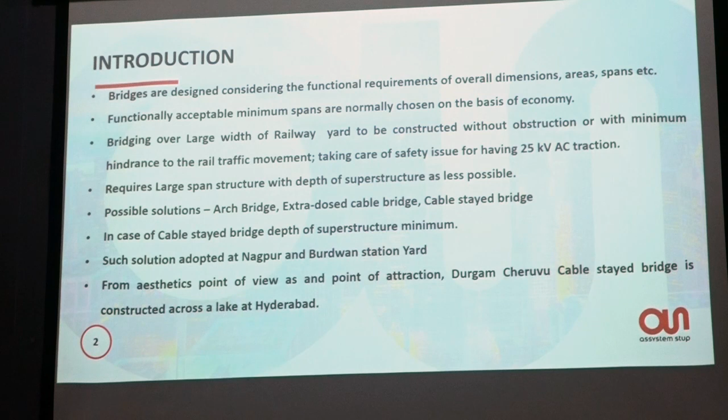The two projects I did were the same, crossing over the railways. The road has to cross the railway line, and the demand from railway was that there should not be any pier in the railway boundary. So the long span bridge was the first solution that came across for my work.

Then the second challenge was constructing this bridge. Any bridge, the design is one part, the construction is another, and the bridge design as well as construction both go hand in hand. So I am talking more about the construction engineering today rather than the design work.

For long span, the possible solutions could be the arch bridge, extra-dosed bridge, or cable stayed bridge. But being a cable stayed bridge very small in its depth, so it was chosen. And these solutions were adopted in two locations: one is at Nagpur and one is at Burdwan, West Bengal.

The third one I will talk today is basically an architectural driven project, that is the Durgam Cheruvu project. Aesthetic was given more importance and that bridge was done, so that was a new experience for me. Generally the bridge designers don't come across the architects, so that third bridge will be interesting for everybody.

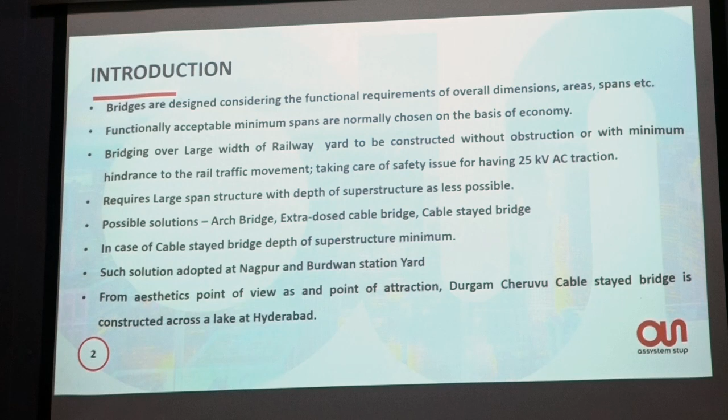So today's presentation will be on these three bridges: one is cable stayed bridge at Nagpur, then the second is cable stayed bridge at Burdwan, West Bengal, and the third is Durgam Cheruvu bridge, Hyderabad.

So for Nagpur, the total span length was 200 meters, and the pylon was placed at this center, not exactly at the center. So the two spans on the right and left were not exactly balanced. One was 88 meters, another was 112 meters. It was a 6-lane bridge, so two separate 3-lane carriageways were there.

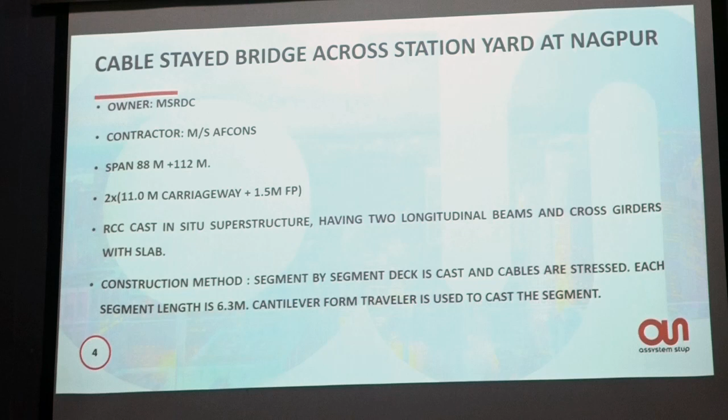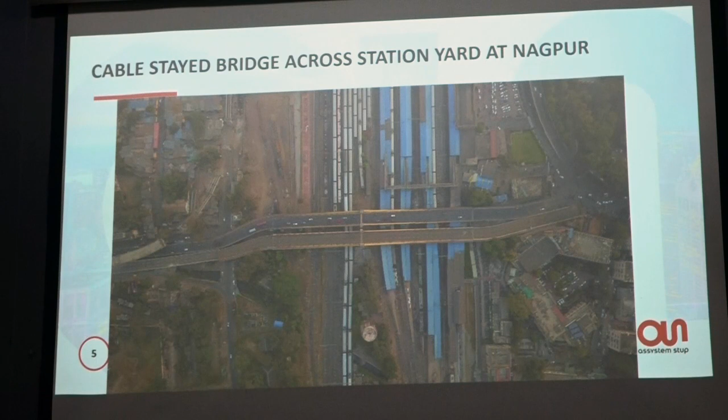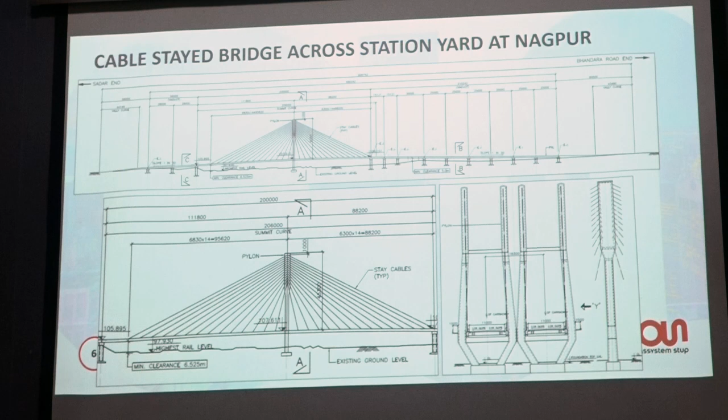The deck is just 1.2 meter depth, so the minimum depth was whatever required clearance was achieved, and the junction was also satisfied with that distance.

With 1.2 meter depth, the overall construction depth was managed. But the side beams were extended later because during construction there was some difficulty. The original scheme was something different, and because of some constraint the scheme was changed, and the depth of the beams was increased above the deck also. So this is something like a semi-through kind of bridge.

The cables are placed on the side two beams. There are two beams running along the bridge lines, 12.3 meter apart, and the carriageway is 11 meter accommodated in between. On both the bridge pylons, there is a footpath of 1.5 meter on the outside of one beam.

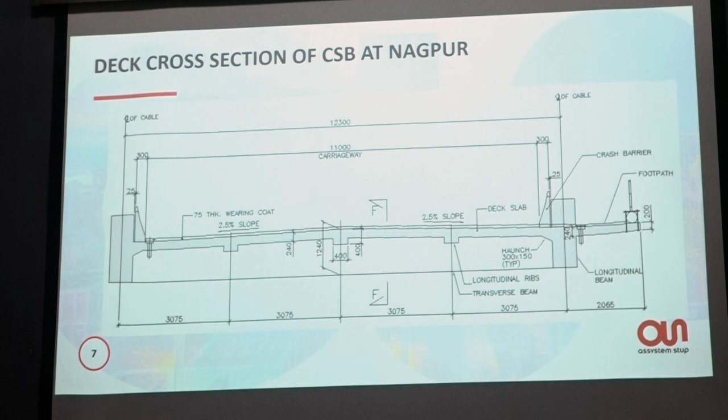Probably the railway yard was extended, then some spans were added, and the bridge was very old, so it was required to be demolished and a new bridge constructed. Vertical clearance was also increased as per the latest SOD, so the new bridge is higher than the older bridge. The span was chosen as the railway asked to clear the railway boundary.

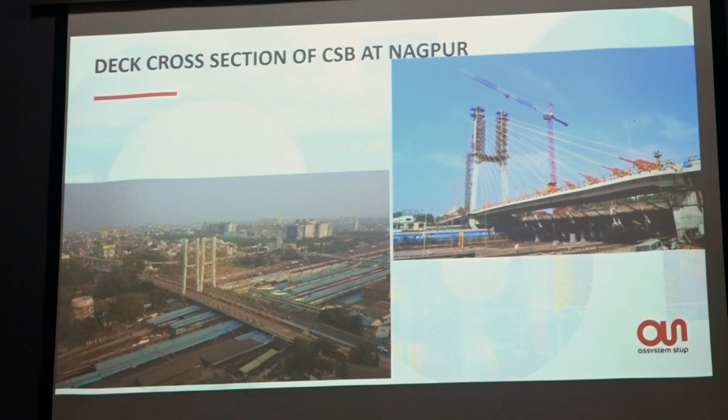The left bottom view shows both bridges after completion. We can imagine the difficulty in construction, because the situation was with the busy railway line at Nagpur, and train frequency is very high there. Also it is a Rajdhani route, so it cannot be closed, and the construction was very difficult.

Now of course the construction cannot be done in a conventional way, where conventionally we erect the staging, cast the deck, and remove the staging after required strength. So that was not possible here.

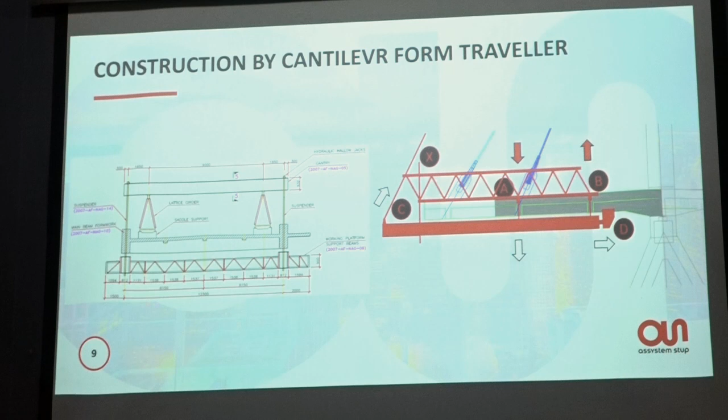So the further construction was segment by segment. Each segment was about 6.3 meter length, and then the permanent cable was stretched. So the deck becomes self-supported, not fully cantilever, and the load moves further for taking further concrete.

Now in this method, or by any way we construct a bridge, we have to always keep our goal that whatever clearance is required, we have to satisfy. Whatever geometry of the bridge is required or desired, as per the vertical curve or whatever form, that has to be achieved at the end of its construction.

So the first diagram shows the deflection diagram, which is the deflection due to dead load, whatever permanent loads are there. Now I have to construct a bridge with the reverse of that diagram. Then only the final geometry will come to the original desired one. So that is called a camber diagram.

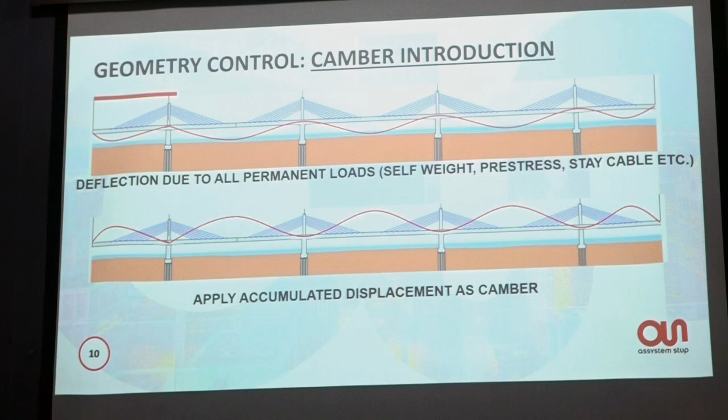Now camber, in case of conventional staging, is easier. We can do it in one stage - whatever the camber diagram is, we can erect the shuttering in the form of camber, lay the concrete, and after removal of staging, it will come to the desired shape. But in segmental construction, that is slightly tricky.

In segmental construction, the deflections go on accumulating. Suppose, for schematic illustration, there are 3 segments: S1, S2, S3. Now S1 is erected, then it will deflect because of its self-weight. After erecting S2, S2 will also deflect, and it will deflect S1 also. So forth and so on.

So the reverse of whatever accumulated deflection curve there is, we can reverse as a camber curve. But here the concrete strength of S1 will be different when S3 is cast, and when S2 is cast it is also different. So we have to account for that, and that is slightly tricky.

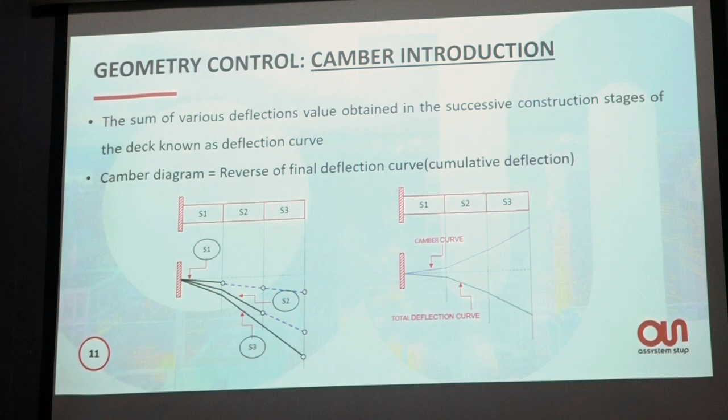Nowadays software is available where we can model such non-linearity. The overall behavior is non-linear. To capture this camber diagram, we have to model the concrete strength curve very precisely, and the activity, because generally we plan something and at site it goes something else. So we have to accommodate that in the design.

So the factors affecting the overall construction are the concrete strength at various times. Generally we designate concrete strength at the 28th day, but here it is equally important to consider concrete strength at different ages, because the age of each segment is different at a given point of time. Then the second factor affecting the overall camber or deflections is ambient temperature.

If we have a pure cantilever and measure its survey in the morning, the levels will be different than if we measure it in the afternoon. Similarly, the pylons are very tall, and there is an effect of sun path, because these pylons were facing exactly east-west. So in the morning the pylon was deflecting on one side, and in the evening it was deflecting on the other side.

So that also has an effect. Then the assessment of construction load is very much affecting the design. Whatever weight of the gantry was initially calculated versus what was actually built, there was quite a difference, and then we reiterated all the calculations once again and found we were close by. So that assessment of actual dead load and the construction equipment the contractor has planned has to be considered in the calculation of the camber diagram.

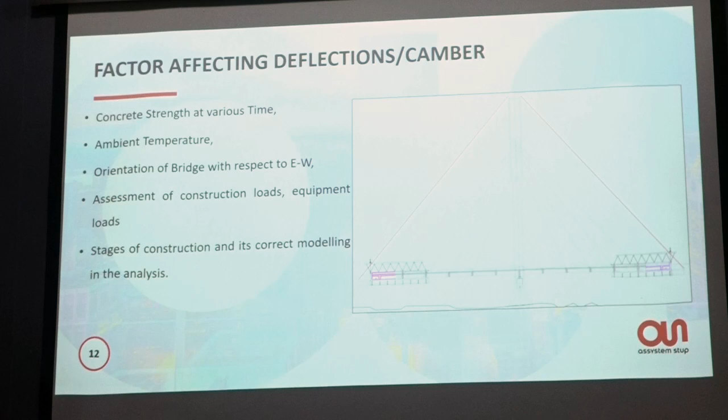Nowadays the CEB-FIP model is a popular one to assess and analyze concrete strength at different times. So CEB-FIP Model 1990 was used. In that model, the concrete strength at any time can be considered with the expression mentioned here. Also, it calculates the effect of creep and shrinkage.

The concrete deflects because of sustained load, that is called creep. Also it exhibits shrinkage - shrinkage in the initial period is high, and capturing that in the assessment of deflection is very important, and that is available in any modern software, and such modeling was done.

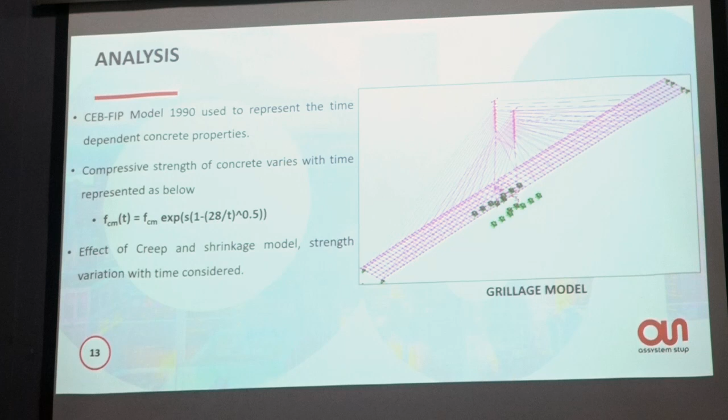Modeling was done initially with finite element method and shell elements, but it was taking too long to analyze. Then we shifted to a grillage model, and we found the results were close to what we modeled, so we continued with the grillage model, which was faster for taking trials, because anything we do is not at one go. We plan something and at site it happens something else, so we have to reiterate the whole process and do corrections for the next cycle. The grillage model was more effective, so the grillage has been considered.

Now the deck and tower monitoring is very much important during construction. Initially we plan something, and as per that planning, from the designer's perspective, we give some output with the assumption of loads and whatever concrete data is there. We generally give the deflections of beam at various locations at various activities. Similarly, deflections or the values for the pylon deflections are also given.

Then those are monitored at site, and the correlation between the analysis and actual at site is done. So it is a bidirectional process - the designer gives some output, then it is cross verified at site. If there is a difference, we have to cross verify whether the assumptions are going wrong, or any correction is required in the analysis, or any factors which are not really captured. So we have to see.

In the initial period, we were not considering the temperature, and that has a great impact. So that was a takeaway in this analysis overall model. There were certain more also, like whatever time cycle we were considering and whatever time cycle actually was happening - that was also different. So then we corrected everything, and we came to a close result after say the third or fourth segment, and we found that it was okay till the end of construction. So the first 3-4 segment construction was slightly difficult.

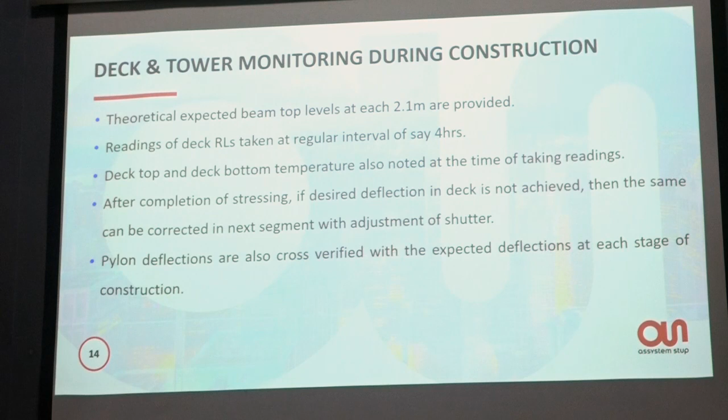Now coming to the second bridge, that is ROB at Bardhaman. It is in West Bengal. That is also a similar situation like Nagpur - it has also, I mean, a very busy yard and busy station. Bardhaman is a famous station, I think it is on the Delhi-Kolkata line of railway. There the total length of bridge was 188 meters - in Nagpur it was 200, here it is 188 meters. But here the unbalancing was more.

I mean, the pylon location was chosen outside the railway boundary. So from execution point of view, that was a very good decision - that construction of the pylon away from the railway line is always desirable, and that was done. So the span on the main railway yard or railway station side was 124 meters, and on the back side it was just 64 meters only. It was a 4-lane ROB, so there are 2 carriageways of 7.5 meters, then there were footpaths as a mandatory requirement.

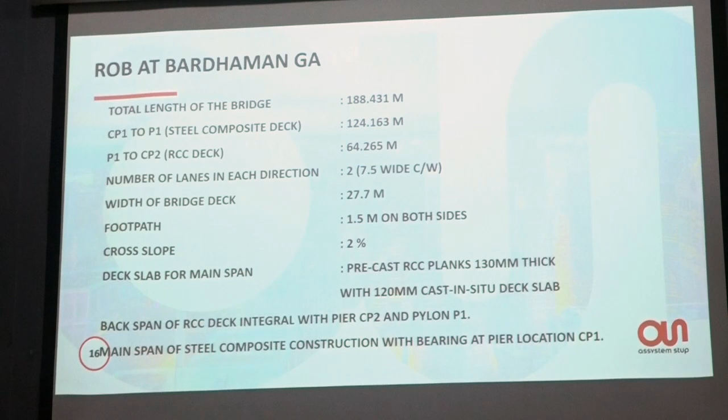So the general alignment drawing looks like this. The backside span is very short, almost half the length of the main span, and the tower height here also was almost 51 meters. As we see, the front span is bigger, back span is shorter. We have to balance the weight at the pylon, otherwise there will be a continuous unbalanced movement.

So the section of the front span was steel girder - lighter steel hollow girders with minimum thickness of deck slab. Whereas on the back side, we have to generate the dead load, so solid RCC beams were there, and the deck slab was also made thicker to balance the overall weight.

The back side and the pylon were made integral - so the pylon below the deck and the back span is integral and in concrete. So this much area is integral. Above this, the pylon is in steel - steel segments were done.

So by the time the foundation and this backspan was done, all the girders as well as the pylon fabrication was ready. So erection of this pylon as well as erection of the front span was much faster as compared to our earlier case of Nagpur, which was totally in concrete.

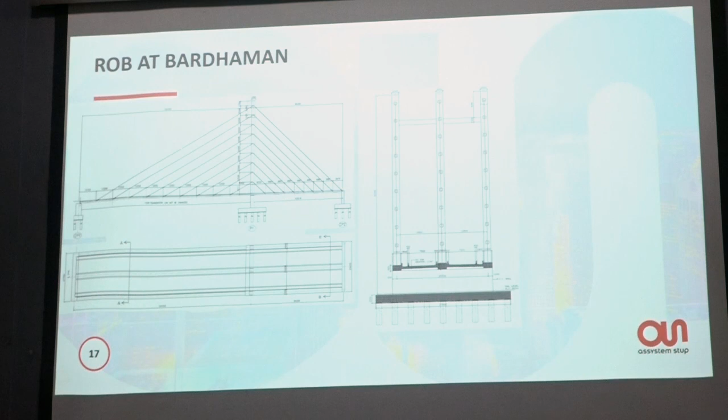Now the construction sequence was typically planned like this: the backspan was constructed first - the two piers and the backspan integral were constructed. Then the three steel pylons were erected using gantries and tower cranes. Then erection of the first panel was done, again with cranes, and those were fixed. After that, the steel members of each segment were erected using the specially designed deck erection crane. I will show in the next slide.

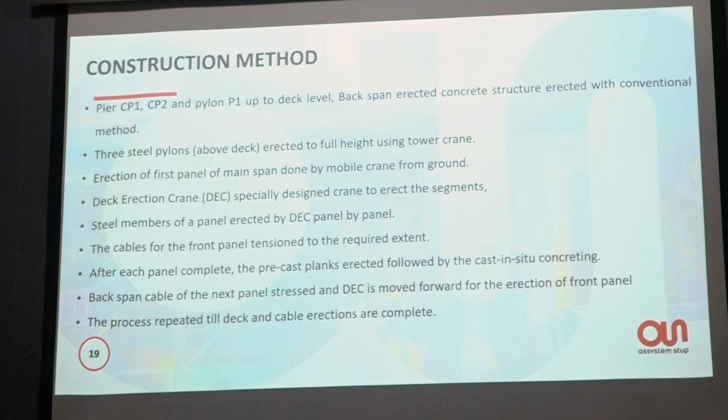The material for the next segments was fed from the back side, so there was no disturbance for the railway below. All materials for construction of the deck were fed from the back side. A crane standing on the first front panel supports these segments, holding each one until it is connected to the already constructed deck.

Then the permanent cables are stressed, and the deck slab was constructed with precast panels. Precast panels were placed, and the remaining small portion was done with in-situ concreting. This construction method was much faster and more precise compared to the earlier case.

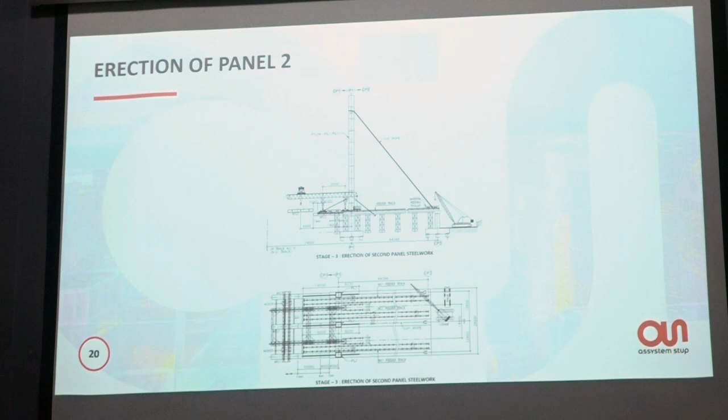The same sequence was followed till the end of construction. This was the earlier slide showing the second panel erection, and now this is the erection of the last panel, the 10th panel. The crane is moving to take up erection of the 10th and final panel.

The back staging was kept as it is till the end of construction, because it was required from the design point of view, as all cables were erected on the back side also, stage by stage. Otherwise there would have been a huge unbalanced bending moment on the pylon.

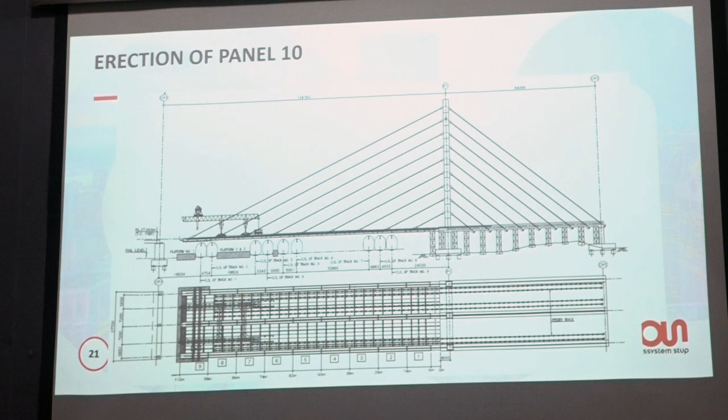Whereas in Nagpur it was almost 220 tons for erecting a 6 meter segment, here the segment length was longer, at 12 meters, because generally steel plates are available in lengths of 12 meters. So each segment on the Bardhaman bridge was 12 meters in length on the front side.

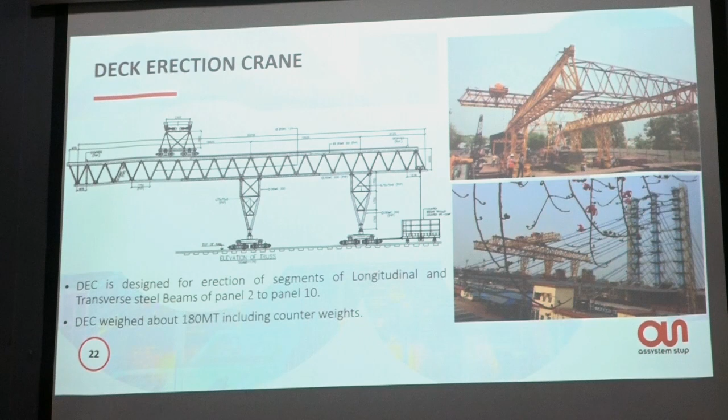The geometry control methodology was similar to what we did in Nagpur, but here the difference is that the panels were prefabricated steel prefabrication. The holding bolt positions were already fixed in the already constructed deck, so there was hardly any chance to adjust the deck during construction.

In Nagpur we used to adjust the deck by adjusting shutter levels, but this adjustment was not possible here. The only adjustment possible was through pre-camber in the steel girder. That was exercised, and if there was any difference after erection, it was adjusted through cable forces only. So these were the two adjustments possible.

The geometry control methodology is similar. After each activity, survey readings were monitored and compared with the theoretical values expected in the design. In the case of steel girders, the precision in erection, the E value, and expected deflections were more precise compared to the concrete case. So geometry control for the Bardhaman bridge was also much easier.

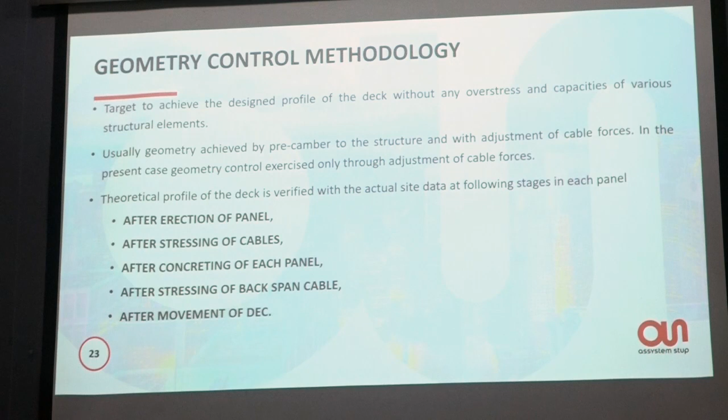After completion of the bridge, there were three girders. The uniqueness of this bridge is that there were three pylons and three longitudinal girders because of depth restriction. We achieved geometry accuracy of plus minus 60 mm, and after the wearing coat that was also covered. This accuracy was achieved with a panel length of 12 meters; had it been a smaller panel length, we probably could have achieved even more precision.

After looking at the construction of both bridges, I think the Bardhaman bridge was planned after the Nagpur pylon was constructed. They then decided to shift the pylon outside the railway boundary for safety reasons and changed the deck from concrete to structural steel. This decision came from the authority itself, and construction was so fast that before completion of the second bridge in Nagpur, the Bardhaman bridge was completed. Though started much later, it was completed much faster, and that's why it is now popular in railways.

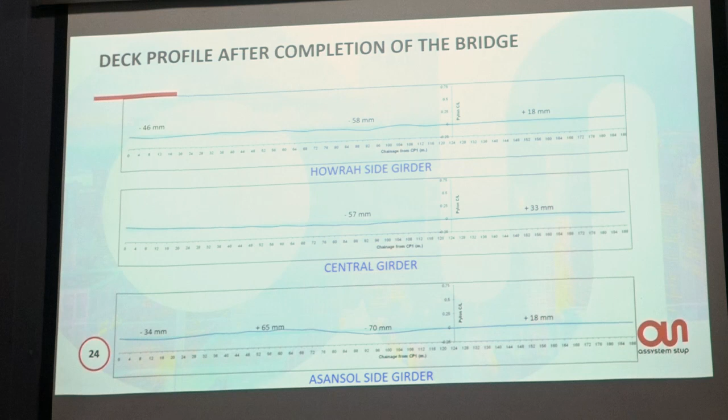Now in Mumbai suburbs, some more bridges are planned like this to bridge between the east and west sides of the railway line. So some more such bridges will come up in Mumbai now. That is the popular solution in railways now for crossing the railway line.

Now coming to the third bridge which I am going to talk about. This is at Hyderabad. It again has a 234 meter central span, and there are side spans which are smaller.

Ideally for a 234 meter span, we would have gone for at least 120 to 125 meter side span. But because of the geometric constraint and the land problem, the spans were restricted to 90 meter, 96 meter.

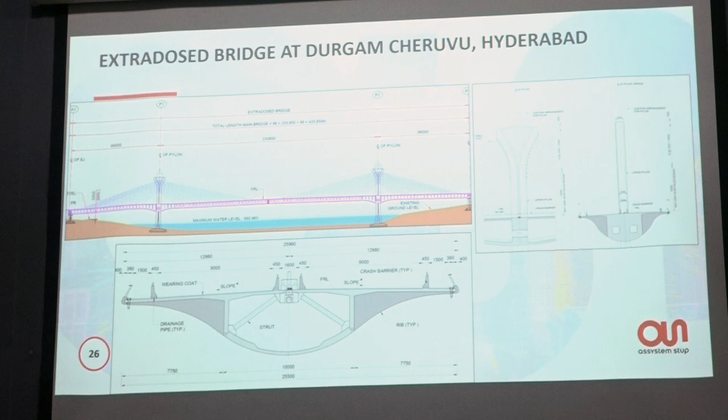I'll show the next photograph so that it will be easy to appreciate. The overall design of the bridge is mainly an aesthetic driven project. Initially only the 234 meter span was fixed, so we proposed some conventional option of a cable stayed bridge.

With rectangular sections of steel, which was easy after Bardhaman, so a similar solution was proposed with the 234 meter span also. It was a cable stayed bridge, but then the authority said they were going to develop the lake for a public place.

From that perspective they demanded that it should be an aesthetically pleasing structure. So the architect came in. That was our first experience in an infrastructure project with architectural input, which was very difficult at the initial time, but later on we collaborated together and came up with a good solution.

So the dimensioning or the basic shapes were given by architects, then all the detailing was done by the architect. The right side shows the 3D animated view, which was imagined by the architects initially, and the left is the almost completed bridge.

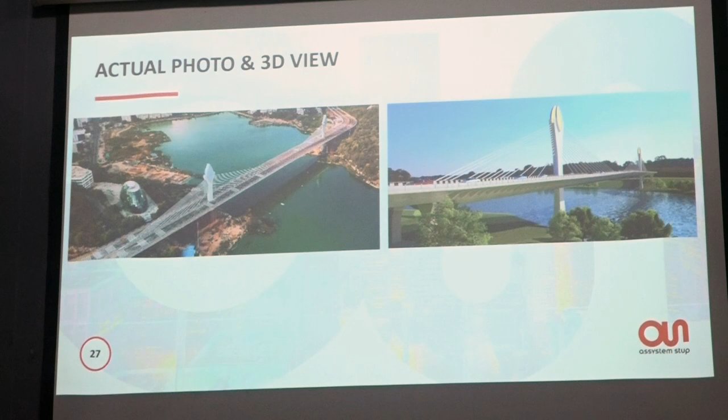Which are very much close by, and nowadays it is popular in Hyderabad to visit this place, and it has become a popular place.

Again, here the construction is of course segmental. The backspans were constructed using conventional staging. All the girders, all the segments are precast segments. On the back side, they were erected on the conventional staging, whereas on the front, inside the lake, it is not allowed to erect any.

That was not even possible, erecting that much long staging. So it is done with stage by stage construction.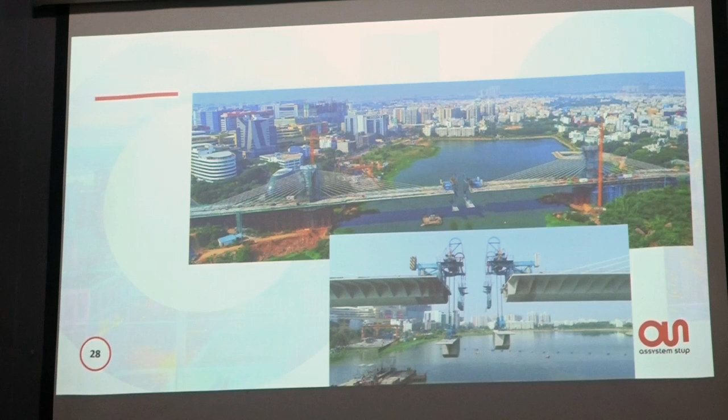The bottom view shows the closer picture of segment erection in place. Again, the analysis is done in a similar way, stage by stage analysis was done, then the same was given on the drawing, and the expected levels were given, and then it was cross verified at each stage. Here the advantage was the deck is very stiff.

This is called an extradosed bridge, which has got a very deep beam and stiff deck. It is not much sensitive to deflection, so the geometry control itself was not much of an issue, but it has a disadvantage also. Once the deck is stiff, the adjustment, if anything goes wrong, is also a difficult one.

So whatever deflection curve was required, that was required to be built into the segment construction itself, and that geometry precision was done in the casting yard itself. The segments were cast to the required shape and then erected. Then some minor adjustments were done at site using shim plates or some kind of thing.

So this was the backside span, which was erected first on staging. Now it is ready for taking the next segment. Now the segments are erected one by one. So in between, the stage is like that.

The segments were erected one by one, and cables were stressed. Then the erection gantries are moved forward, and the next segment is held, and then pre-stressed. There were internal pre-stress as well as external pre-stress.

Looking at all these three bridges - the first bridge was very early in my career, I had just 4.5 years of experience then. Of course there were experts who were guiding me all the way. So the first Santra Market Bridge turned my vision, because earlier it was just putting some numbers and getting results and putting them in the drawing.

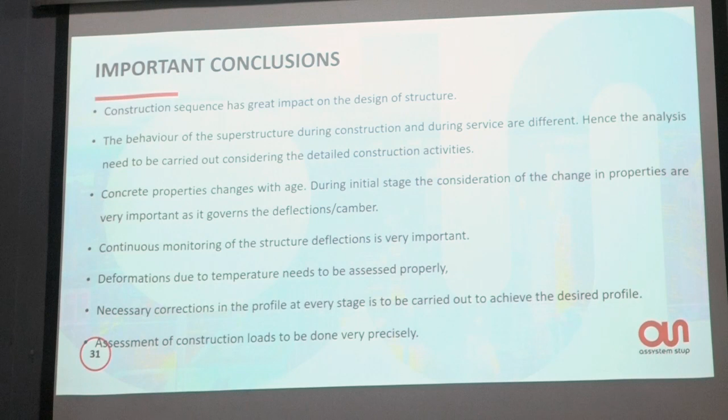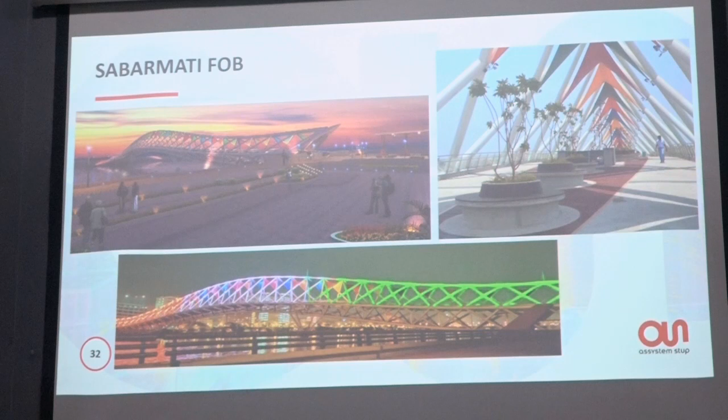After successful completion of the Hyderabad Bridge, the structural and architectural teams further collaborated for this nice bridge—the left shows the animated view, and the right shows the bottom and side views. This is the Sabarmati foot-over bridge at Ahmedabad, which is almost completed and will be inaugurated very soon. This is again a collaboration of structural and architectural people in infrastructure, which is very rare. It's aesthetic driven, but structurally we also optimized it, and the bridge is now ready for the public, coming very soon.

There are two further bridges located in Pune that we are working on. This is the Deccan Bridge for Pune Metro—Sarla Madam is present, we are working on Pune Metro—and it is designed based on Mawla's Pagdi; the cross-section view looks like Mawla's Pagdi. That was the architectural theme for the structure.

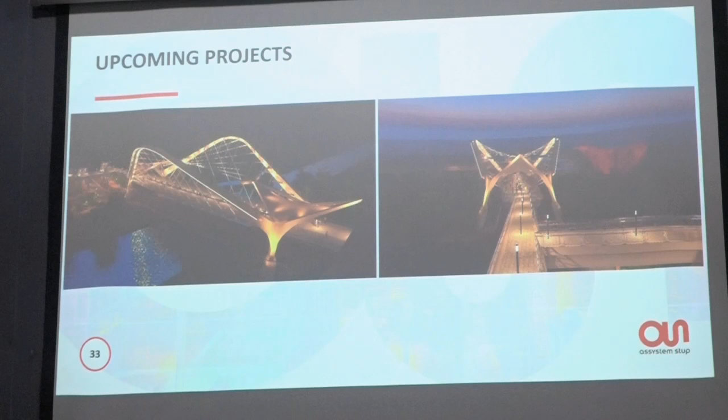Talking about the structure itself would be another lecture taking more than an hour, because the erection of these arches, their behavior, the tensile elements used, and the optimization—all these activities were done with great effort. I hope this will be realized soon. Let's see, because this bridge has not yet started.

The third bridge is again an architecture-driven project, also in Pune city, near Sambhaji Garden for Pune Metro, connecting to the station. This is also a foot-over bridge, with the architectural theme driven from the shape of a Tanpura. It is coming near the Bal Gandharva auditorium. So Tanpura is the theme for this, and it is under construction—the pylon construction has started, the foundation is complete, and the pylon is almost completed up to deck level. So this bridge will also come.

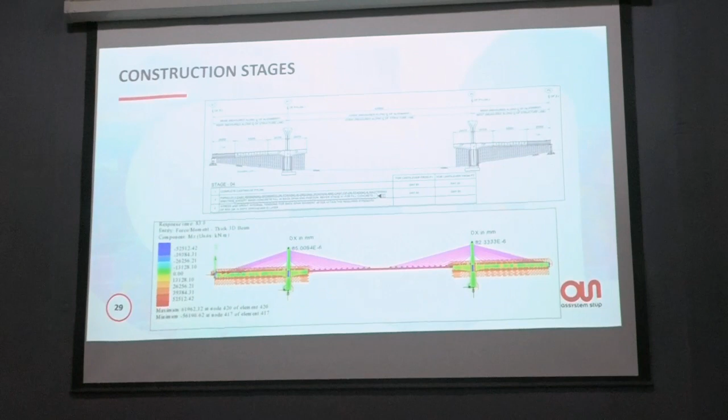Regarding the spring elements shown in the third bridge—the staging is resting not exactly on hard strata. I won't say loose strata, but not exactly on rock. So the deformation of staging has to be considered, otherwise the pre-camber could not be done properly. The spring values were taken from plate load tests, which were done randomly at various locations, and then those spring values were decided.

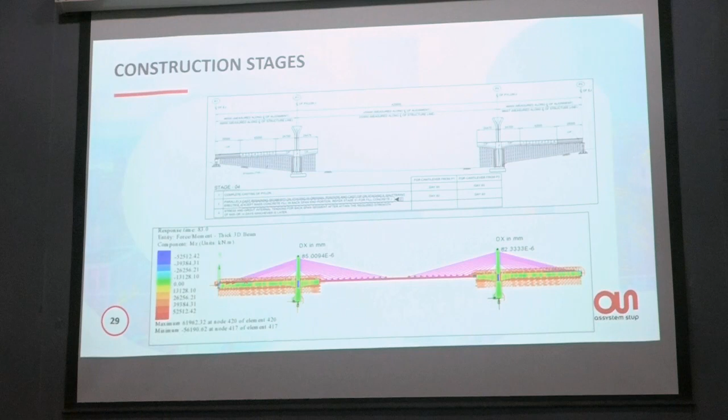Regarding the accuracy achieved with previously defined camber values during construction, the total span is 234 meters, so roughly 120 meters from either side is a cantilever.

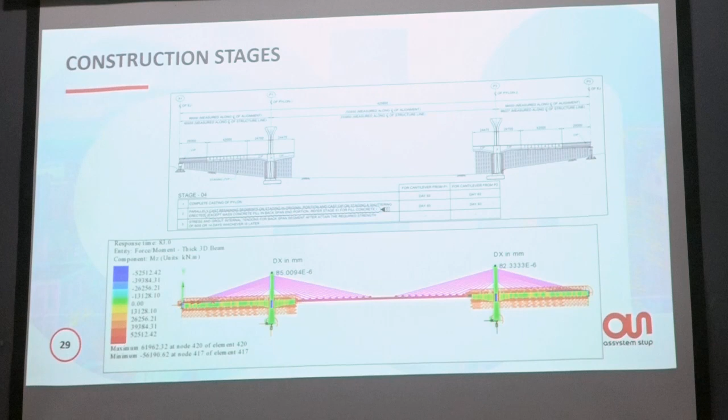The final three segments were required to do the shimming. There was a difference of about 55 to 60 mm between the two cantilevers, which were originally planned to be constructed symmetrically. In reality, that didn't happen because the right side pylon was not accessible initially, then some land issue was there, which was withheld. So the right side pylon was constructed later, and that deck was erected late. We decided to stop construction on the left side, but there was pressure because some progress had to be seen at site, so the left deck was constructed.

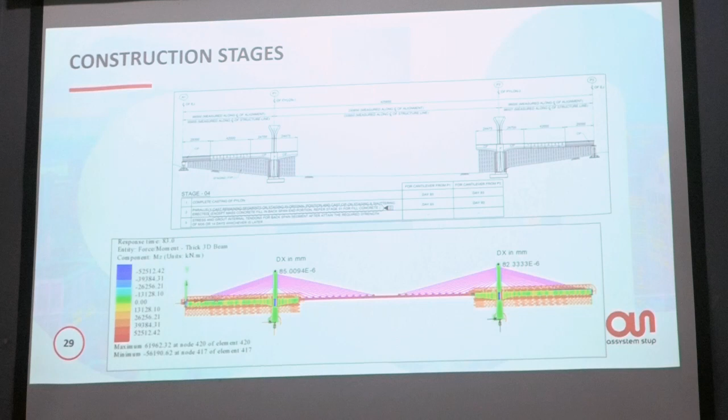But after all, there was still a 60 mm difference between the two sides of the cantilever in the 120 meter span. They were adjusted in three segments on either side, so total 6 segments were done with correction at site using shimming plate and epoxy grouting, etc. And that was achieved.

Good evening sir. The first Nagpur bridge that you were talking about - in other bridges you have used precast members, but in that bridge it was cast in situ. That was the first experience. After learning from that project, we changed from cast in situ to steel. The third one is architecturally driven, so steel was preferable from a designer's point of view, but not from an architectural point of view.

The third one using precast is always a faster construction, the construction pace is faster - that was the thing that I was worrying about. Why so much hassle taking the concrete strength? The original tender was bid on that basis, so certainly we cannot change from concrete to steel. It is a costlier material. But at the end we found that had it been converted to steel, the life of everybody would be easier. Some things are not in control of the designer only, and that has cost implications also.

I would like to know more about the CEB FIP model 1990. Does it only measure the compressive strength part? No, it gives the overall behavior of concrete - creep, shrinkage, as well as strength, and strength directly affects the E value, elasticity. So all three parameters are considered in that. Is it freely available? Yes, in software now, Midas, Lusas - those software have it inbuilt, that is available.

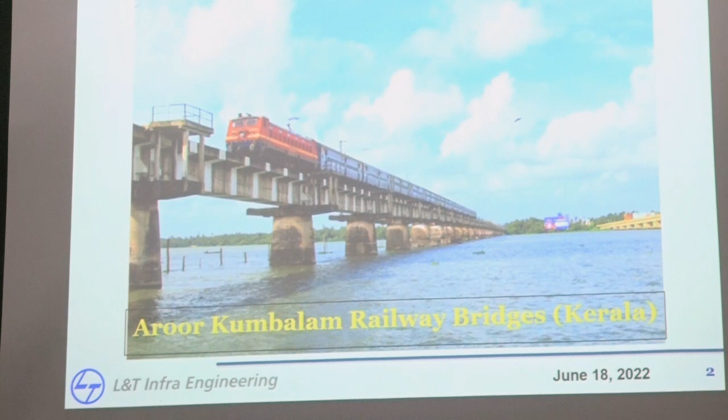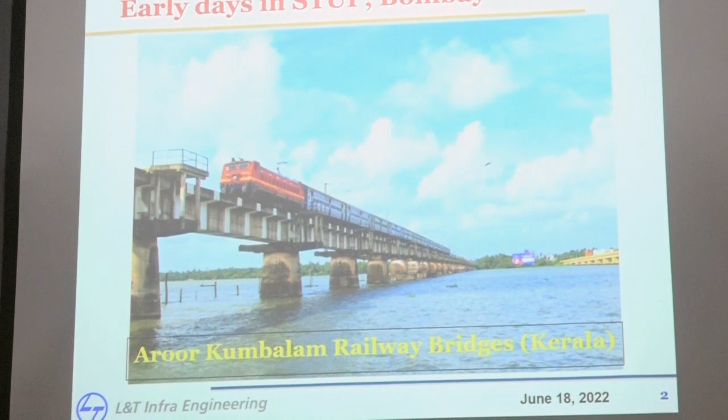The first project, I was all of 24 when I got to do this job, my first job after coming back from the US, finishing my masters. The project was the only example of a segmental bridge in railway. Railways don't like segmental bridges, they like their monolithic structures. Metros also run rail, but when I say railways, I mean Indian Railways. They hate segmental bridges, and this was the first and only example of it.

You should know the background behind why it became a reality. You should blame it on the first recipient of this award, Mr. E. Sridharan. He happened to be the General Manager in Southern Railway when this project was conceptualized, and he is not averse to doing interesting and new things. He introduced many new things, new contractors, new construction techniques, very boldly. So this was an example where he said, okay, let's try out the segmental bridge.

But what was most shocking was that STUP Consultants decided to try me out designing the work. What did I know about prestressed concrete? Nearly zero, other than passing the course. What did I know about segmental bridges? I hadn't seen one in my life. What did I know about prestressing? Nothing. Launching? Nothing. So it was a big learning exercise for me.

But that's where the caliber of your organization comes in - Yogesh will vouch for it. We've all gone through the same companies, STUP Consultants, and they had a great bunch of seniors. I had past recipients of this recognition, also my mentors, my guides, my bosses - Sri Joglekar, Mr. N. Raghavan. They were all my mentors in STUP in those days, and I was a green 24-year-old engineer doing this design.

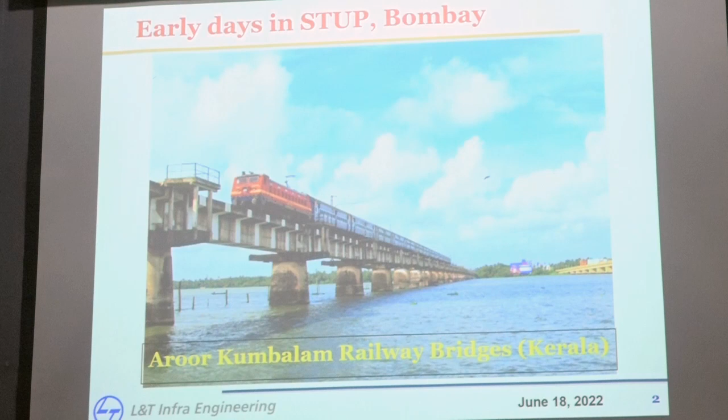I'm not saying it's a great bridge, but for me it's a lifetime of memory in which I got to work on this segmental bridge, and I didn't know what a segmental bridge was. The only thing I did was, at the end of the design, I said I will not support this project unless you allow me to go and visit the site and see it during construction.

This I want to encourage each one of you when you take up your profession. The moment you finish, if you become a designer, you will be office bound, and I find most people like office bound jobs - they don't like site work. It's a rough, difficult place, no malls, no theatres, in the midst of nowhere, especially no infrastructure - that's why we are going there to build one.

So that's why I insisted, because I find that every visit to the site is a great learning experience. From now onwards, I would encourage all of you who go to these construction sites or see construction activities around you, to look at it from an engineer's perspective rather than a layman or tourist perspective. It may be a beautiful structure, but there are a lot more heartaches in the realization of that.

So, as I said, this was a modest span, what we call 100 feet in railway parlance, built across the backwaters of Kerala. What you can see is actually the launching girder of that day. Please remember this is a launching girder of the 80s, very poorly mechanized, or virtually no mechanization.

It is rolling on the back on the erected span, and the front is moved, as you can see, by a barge. The barge supports the front end and is guided forward. It runs, and then you see a lot of these cross trusses. Nowadays you will find a more sophisticated arrangement, as you have seen in Durgam Cheruvu, where they showed wire, suspenders, mechanical lifting - these were all chain pulley blocks, you had no great mechanism. So you can understand that construction engineering, construction activity, and design are continuously changing.

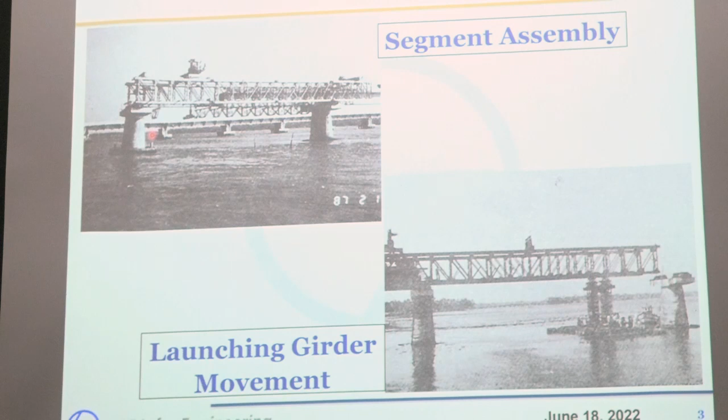When we did this design, we did not have a computer. There was no personal computer. In 1986, we bought the first personal computer, spending 1 lakh rupees on that, and it took 6 months of management notes to justify the cost-benefit analysis. You won't believe it, it had a total memory of 186 kilobytes. It ran a program, but I have designed complex bridges on it.

I have designed chimneys, cooling towers on it subsequently. It's possible. But today in my office, an engineer comes and says, sir, I click this button, I need to change this laptop, it's not fast enough for me. I don't know at that time whether to laugh or cry.

You're not helpless, it's just a point of view. That's not to say that from those days you didn't have the tools to do multiple iterations. So you had to understand the basic principles far better in those days. Today, unfortunately, with the availability of complex analysis tools, very complex deflection calculations and camber corrections are all made easy.

In those days, when I did Thane Creek Bridge, I'll come to that, my life was far more miserable than his. So when you do this, you have to know your first principles right. Then you reduce the number of iterations. Then there is a difference of approach between the designers.